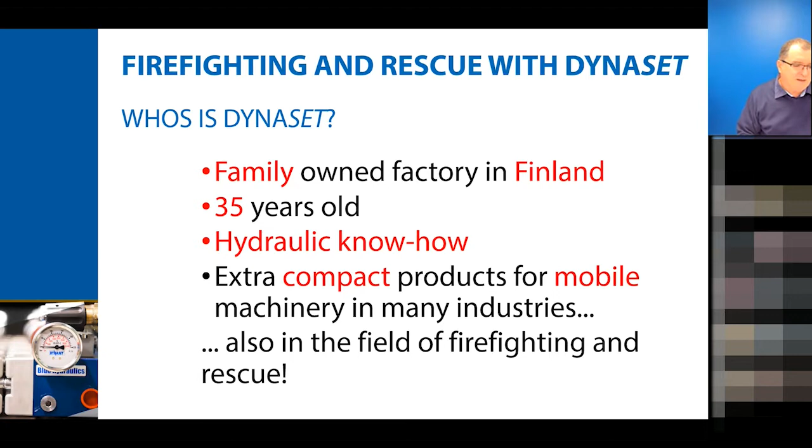So to summarize it, we will use hydraulic know-how, hydraulic power actually, and transform it into other forms of energy. These other forms of energy then give possibilities to work with. For that, on a mobile machinery, we will need to have the availability of hydraulic power. Hydraulic power is needed. We need a mobile power source. So how will it be done?

Very simply, generally speaking, on most of the trucks and fire trucks, if we are speaking about fire trucks, but trucks generally speaking, you can see here a representation of the engine, and here a representation of the transmission box.

And on most of the bigger trucks, you will have the availability of power take off places on the gearbox, which will give movement, which will be a good place to install a hydraulic pump, for example. And if this is not even available on the vehicle, the actual possibility of power takeoff is still existing thanks to the Dynaset HPTO.

The Dynaset HPTO will be not taking its power from the transmission side of the truck, but more from the engine side of the truck, directly on the crankshaft pulley at the front. But all right, we need a power takeoff, we need a hydraulic pump, and we have a power source available on board.

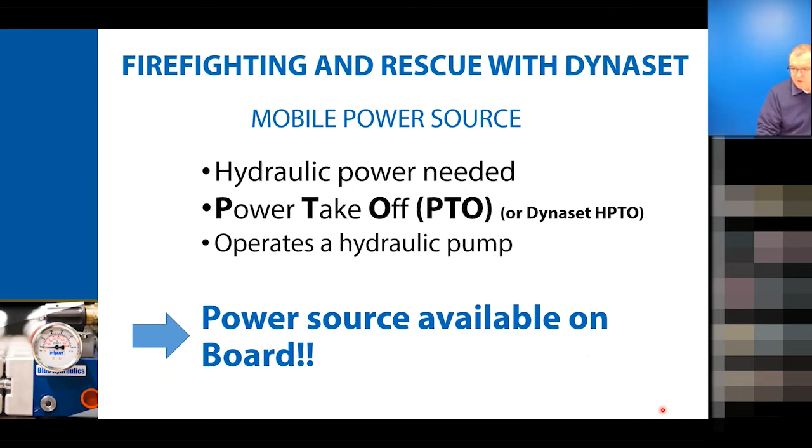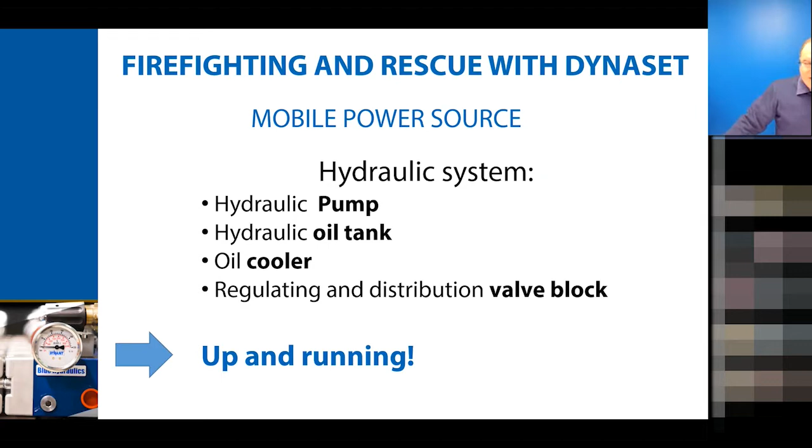This power source is not going to be enough to extinguish fires, that's for sure. We need a few things: a hydraulic pump, yes, check, but also a hydraulic oil tank, an oil cooler, and a regulating and distribution valve block in order to tame and direct this hydraulic power wherever we need it. And we are up and running, with a system able to deliver hydraulic power where we need it.

That's about the hydraulic power needed, and let's see now what we're going to do with it. Let's start first with the firefighting operations, and we'll speak later more about general rescue operations. For the moment, let's just stick to firefighting and fire extinguishing.

We will be seeing what we can do with HPW water pumps, specific HPW fire tools, the FP penetrator extinguisher, the HPP fire pumps, the HCF high flow air blowers, the HSP high flow water transfer pumps, HKR air compressors, and HPU hydraulic power units. That's a lot of different products, and a lot of applications as well. Bear with me, you don't need to remember all the product names right away, you'll discover them one by one in the following slides.

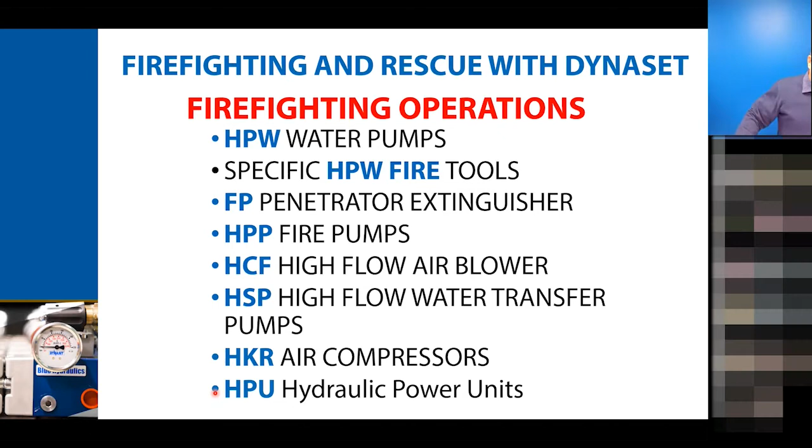Generally speaking about firefighting, I know, even though I'm not a fireman, that there are two schools of thought about the best way to extinguish a fire. There is the traditional way with loads of water, bigger flow, bigger volumes of water spread upon the fire in order to extinguish and flood it. And there is another concept which is more about higher pressure and lower flow of water.

The idea of higher pressure and lower flow of water is what's of interest to us, and you'll understand later thanks to the products we specialize in. A higher pumping pressure means a finer spray pattern, not big buckets of water but smaller drops. This finer spray pattern will efficiently cool down the premises and the fire before you can finally smother it. It also allows for lower water flow - higher pressure lets you use less water, which means a longer firefighting autonomy with the same tank size, and less water damage to property. It probably means a lot more advantages that you professionals already know how to define.

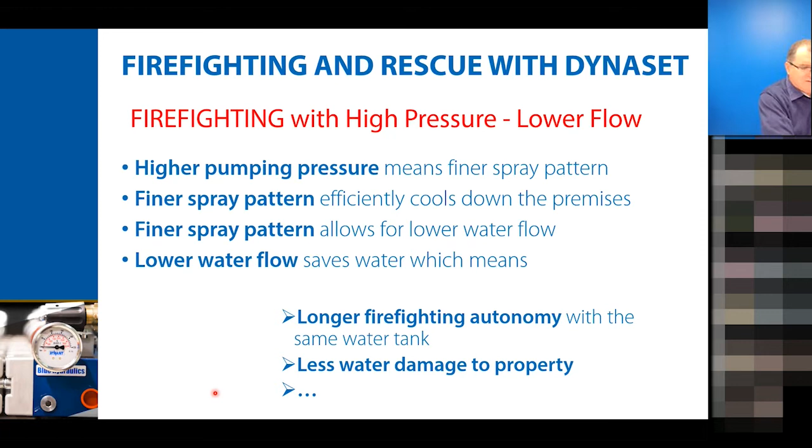So this high pressure, lower flow concept is of interest to us in Dynaset because of this. This is a hydraulically driven water pump, more precisely a high pressure water pump. This is our own design from A to Z, designed by Reijo right at the beginning of the history of this house. The principle is very simple, yet very clever, which makes it very interesting as a product.

Let's see why. As you can see in green here, this is the body of the pump. In the middle, you have an orange area - a mobile group going back and forth. It's constituted of three elements: one central hydraulic piston, and at both ends of the hydraulic piston, you have a water piston on each side. This whole thing is screwed together.

Inside the hydraulic piston, you have a shuttle valve going back and forth as soon as you feed hydraulics to the pump. You feed hydraulics to the pump, and this goes back and forth automatically. How does it do it? Well, it will alternatively draw the oil flow on one side of the piston, then on the other side. It's as simple as that.

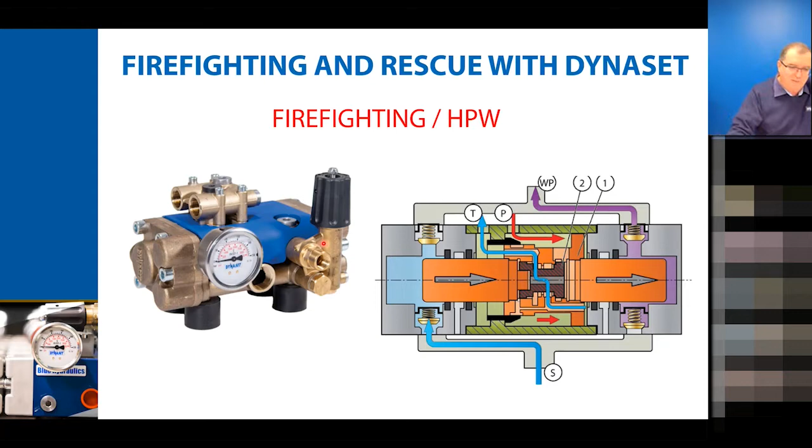It's actually so compact that we know it's the best power to size ratio in the world. But it also presents a lot of other advantages.

It is virtually maintenance free. These pumps don't need to be regularly maintained. You don't need to change lubrication oils or things like that. You just use them, and when needed, you can replace seals and

check valves, water valves, things like this. It is, however, completely field serviceable with standard tools. You don't need special tools, you don't need special organizations in order to service the pump. Once you have the proper documentation, you see it's a very simple unit.

It's self-priming, it can run dry. Yes, it can run dry. It can run without water. And nonetheless, it is a piston pump, but it still can run dry. Amazing? Yeah, I know. You can thank Reijo for that.

On this product group, we have a very, very wide range of models. From a small, the baby of the bunch, 18 liters a minute at 160 bar, up to a big mama that delivers 300 liters a minute at 300 bar. And in the middle, we have smaller output flows but much higher pressure levels, up to 1,200 bar.

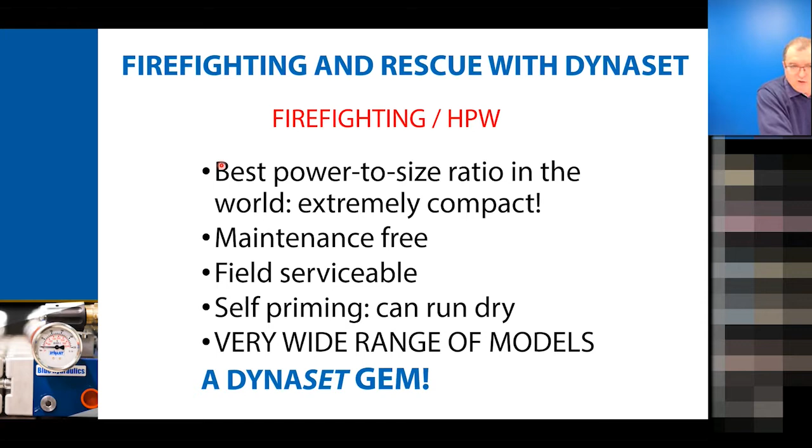Now, what shall we do with these pumps? High pressure, lower flow to extinguish fire. Now that we have this high pressure pumping heart in place, up and running on your mobile vehicle, hydraulically driven, and so on, it will provide pumping function for the following products: HPW Fire.

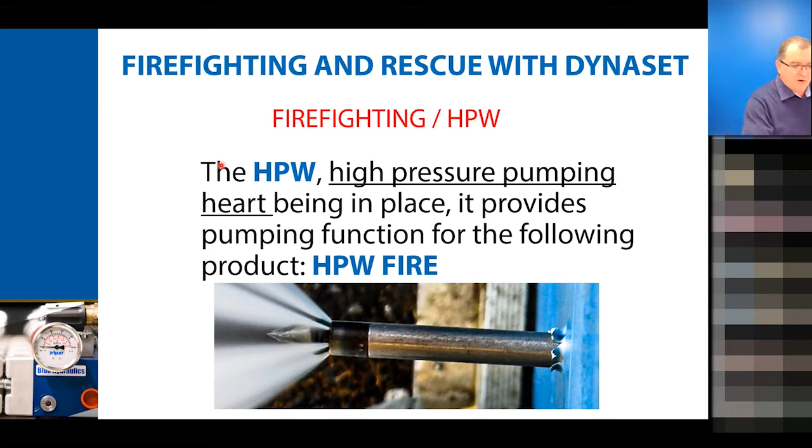HPW Fire using water. It's actually a tool set, HPW Fire sets. We'll see soon what it consists of, but it's actually meant to be used with different pumps.

30 liters a minute at 200 bar, or 50 liters a minute at 220 bar, or for the big needs, 90 liters a minute at 80 bars. As you can see, even the biggest and the most powerful of these still uses only 90 liters a minute. You know what the standard traditional fire pump uses, so I'll let you do the math.

With the same amount of water, you can last much longer. The interest of this tool set is that it's very agile in confined spaces. Why? Because actually the fireman will be pulling behind him the pressure line, the water pressure line, plugged in here to the gun. The water pressure line, being a high pressure line, doesn't need to be very thick or heavy. It's much easier to pull behind and go up the stairs much faster.

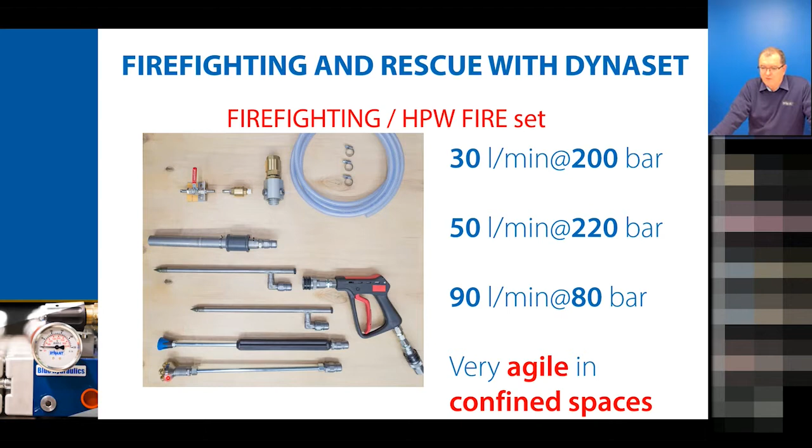This same gun will be used to operate 4 different functions of this set: 1, 2, 3, and 4. Let's discover these functions now, if you will.

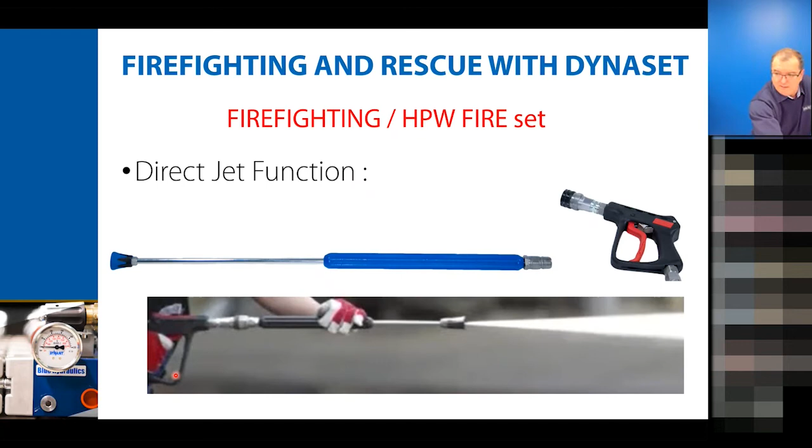Direct jet function. Very simple, doesn't need much explanation. You have one water spray coming from the gun at high pressure, and it's pretty efficient nonetheless, with a strong impact.

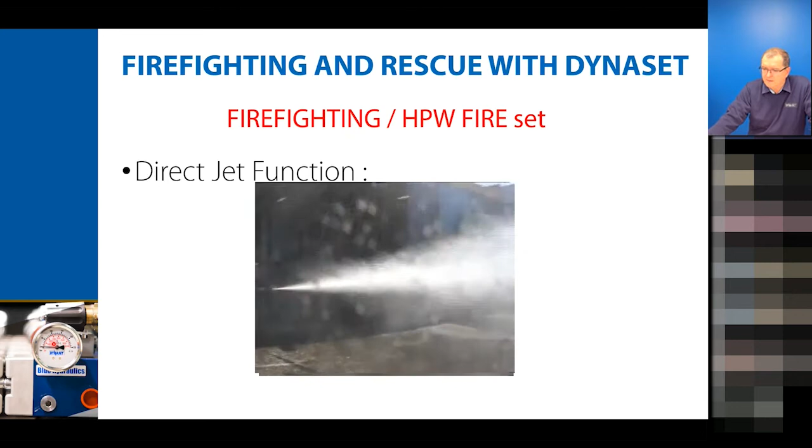As you could see, there's quite a serious amount of power nonetheless, even though it's a smaller amount of water and high pressure. You do not want to stand in front of it anyway. And there is still a strong impact into the flames, into the water, the fire, the heart of the fire.

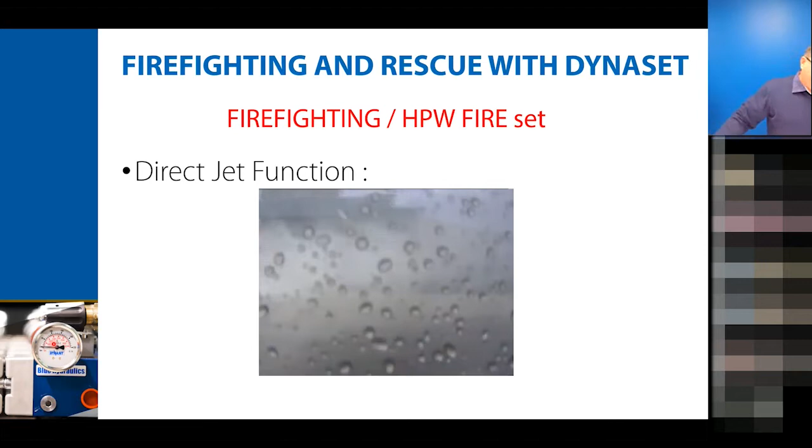This nozzle is as hard as it gets, hardened steel, but you have water spraying jets in the nozzle. This is left straight so that you can hack the spike through a wall or a door frame, through anything you can make it go through. Then, still staying outside of the room with the fire inside, plug the gun in there, let the water go, and you will have what follows.

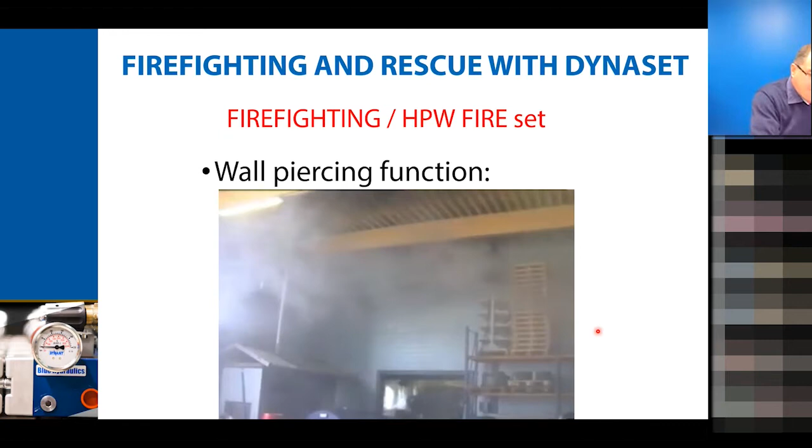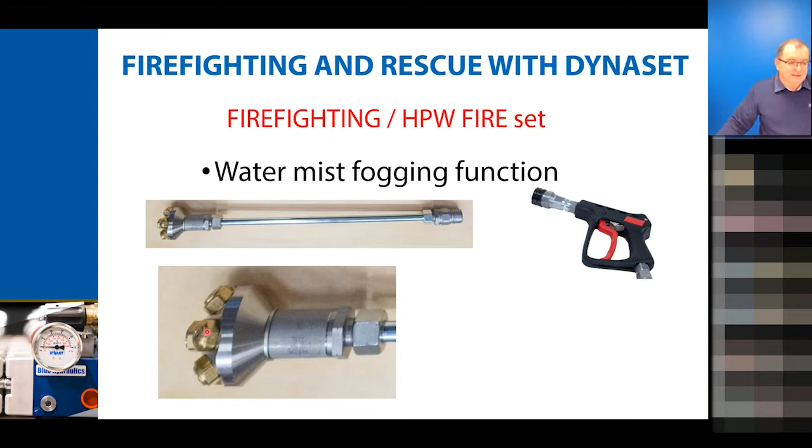Next we have the misting or fogging function. It's still a high pressure flow, with a series of smaller nozzles. Now we don't have straight jets like we had earlier, but a mist, a big amount of fog coming out. A good video will let you understand a bit more about what it looks like.

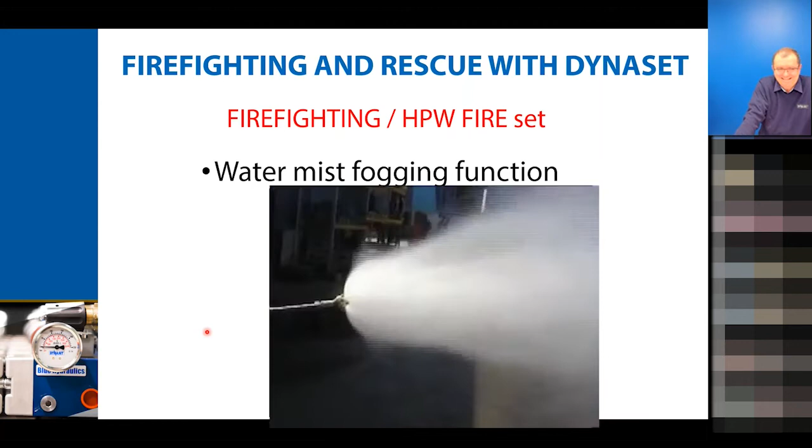As you could see, it's a very thick fog, dampening all the surfaces but not flooding them. Very interesting to cool down a corridor or room while advancing towards the fire. Not the same as a direct jet, but covering a wider area. The principle is more like a sprinkler system with fine fog coming out of it. I truly believe firemen like these functions.

And then the last function of this tool set, the foam gun. The foam gun function consists of 3 components per se, but 2 of these will be on the truck, and the third is a nozzle that the fireman carries with him.

The foam is the conjunction of high pressure water and an additive, some kind of soap so to speak, that creates a thick foam when they mix up in the area of the nozzle. This nozzle also has a setting handle. The more you pull it towards the back, the more air you include into the mixture. If you pull this handle towards the front, you will have less air, and probably just very little foam as well.

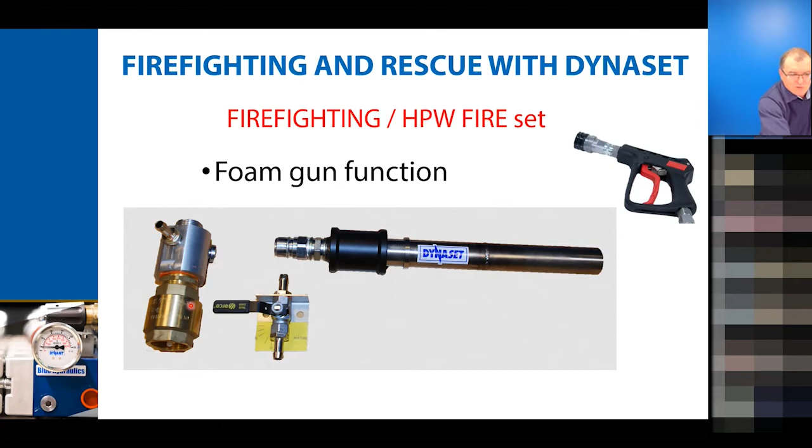So what happens? The fireman is in a confined space at the other end of the hose. He can call by radio his colleague on the truck and tell him to open the suction line. Let's see what it does. This is not CAF, not compressed air foam production. This is something completely different. It's simple foam, and nonetheless, we think it can be of certain interest.

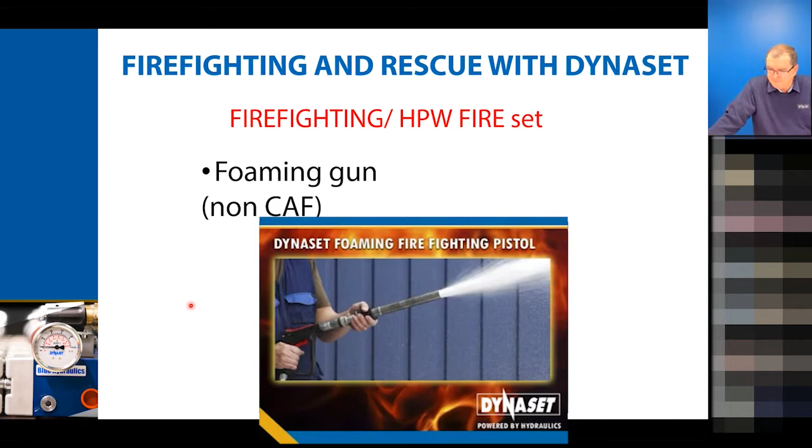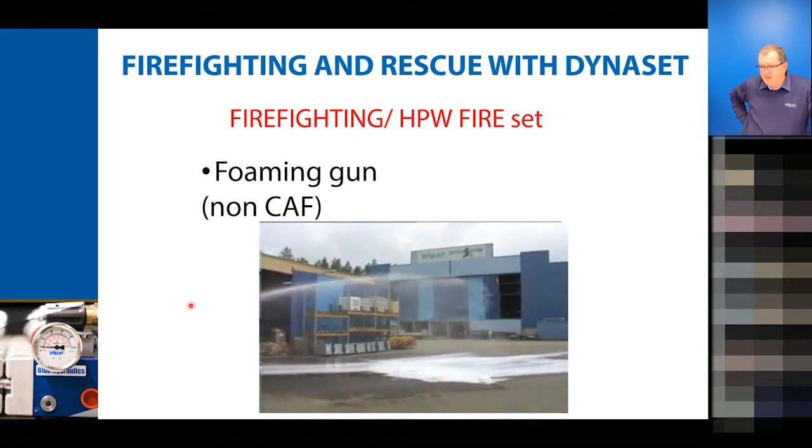There, but you have to try it, you will see. I think professionals can judge the effectiveness of this kind of foam production, especially in confined spaces. We believe it brings some edge to firefighting techniques. That's it about the HPW fire set of tools for firemen and women.

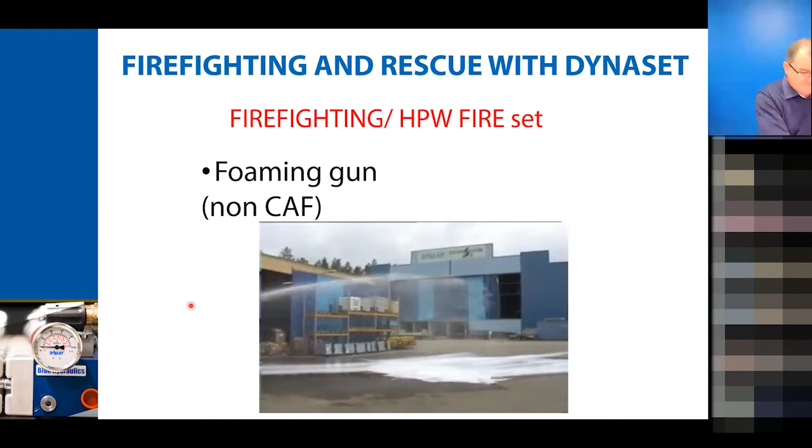Now, next product in line. It's a product using the same properties as the wall piercing tool of the HPW water fire set: the HDFP, the fire perforator.

This thing is an attachment that you can add on a robotic arm of some sorts. We can see later what kind of arm. It also has the same principle, a dart shooting through a window, shooting through a roof or a softer surface. I don't think it would go through concrete per se, but it's pretty powerful.

The interest of this, as for the wall piercing tool we saw earlier, is that by doing so, you will not allow loads of oxygen to enter the room or space you are fighting fire in. You will not allow the entrance of oxygen while extinguishing, which is pretty interesting as well. It will not feed the fire, it will help extinguish it.

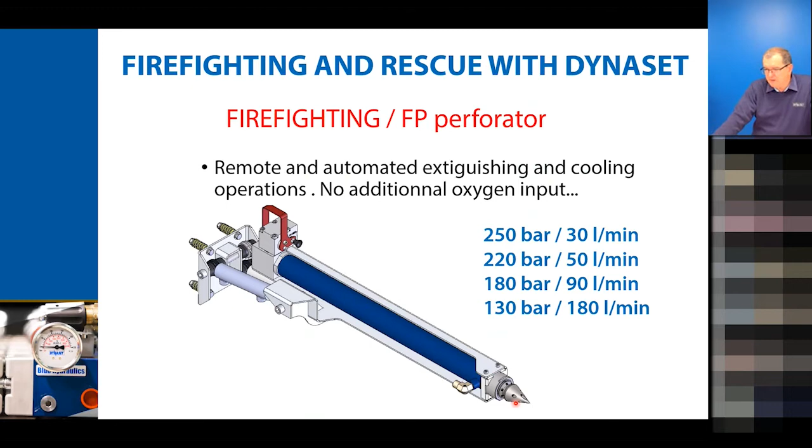We have 4 models, actually the same body, working for different pressure and flow levels. We will be working with different nozzles: 250 bar 30 liters, 220 bar 50 liters, 180 bar 90 liters, 130 bar 180 liters for the big mama. This all depends on what HPW pump you will be using.

You can see more in detail the spearhead of the spike. You have 3 nozzles spraying straight forward, 3 nozzles spraying at an angle of 15 degrees, and 6 nozzles around here spraying at 40 degrees. You will see the spray pattern that it gives later on. We can replace these small nozzles in order to obtain the proper pressure level at the proper flow.

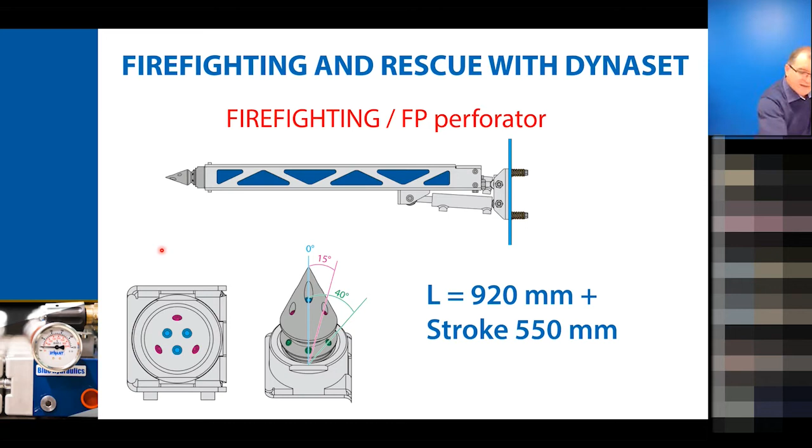The whole length of this, let's say in non-working position, is 920 millimeters, and the stroke is 550 millimeters more once it comes out. There are 2 little cylinders allowing the operator to direct precisely X and Y, like where he wants the dart to go.

As I said, it can be installed on lifting platforms, robotic arms, you name it. And I even believe that it could be possible to put some extra installation on a fireman's big ladder, for example. But I'm not a specialist, but what the hell, it should be possible.

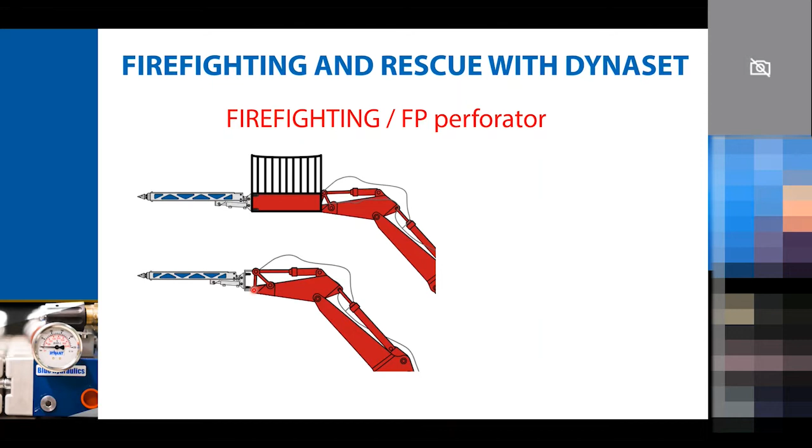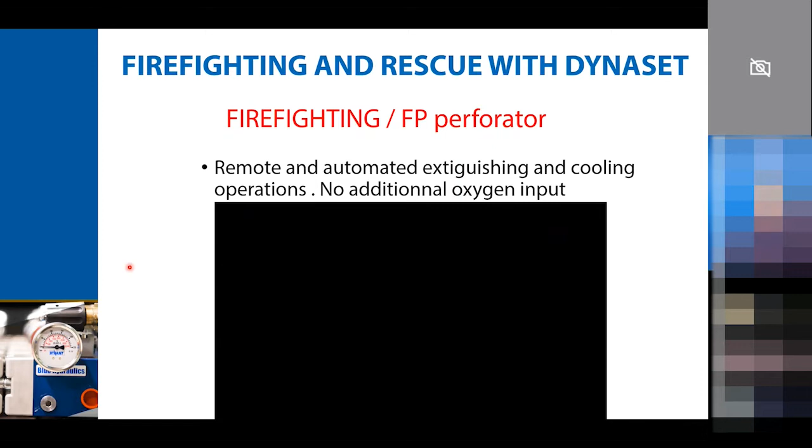So the interest of this product is the remote and automated extinguishing and cooling operations with no additional oxygen input. The fact that it's remote also adds to the more secure way of working. You don't need to have a man hanging outside of the window of a 5-story building. It can be done from the ground with a camera.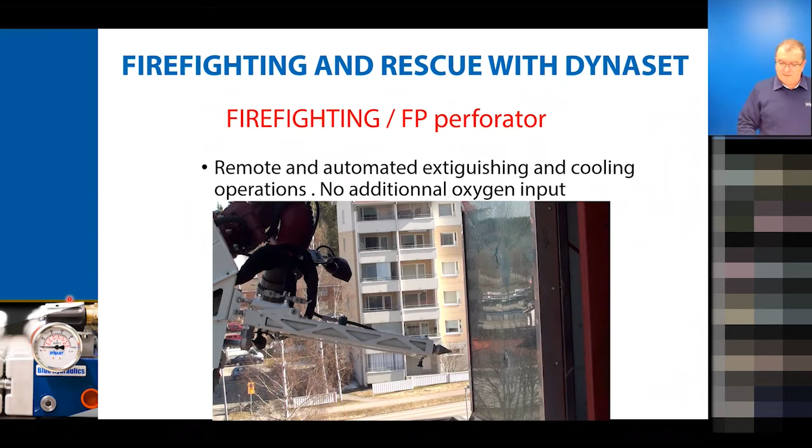There, you could see the spray pattern, and keep in mind, please, that the spray patterns can be a little bit different depending on the water flow and the pressure level that we are using, so depending on the pump.

In addition to these tools that I've just presented, there is also a very interesting function that can be added to any forest firefighting truck, such as the one that you can see on the right side of the slide. This is just an example.

Since you will have an HPW high pressure water pump on board the truck, it is then possible for you also to install a self-protection device on the truck, meaning that you will install a high pressure water misting nozzle series all around the truck.

All around the truck, protecting the underbody, protecting the wheels, the upper body, the windshield, and everything. This is interesting to protect the whole truck from heat. As the professionals among you know, the idea of being surrounded by flames because the fire has been so fast that it surprised the fireman. This equipment makes the fire truck a safe haven for the fireman.

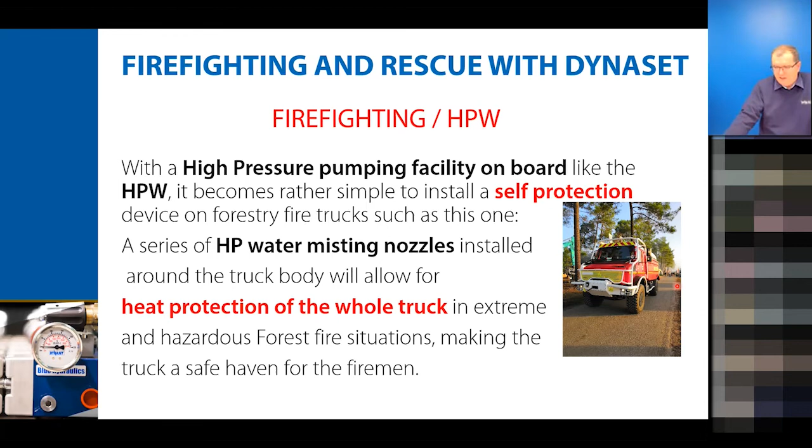These are not the biggest pumps that exist in the world of firefighting, but they are still interesting, I believe, ranging from 1,500 liters a minute to 600 liters a minute, smaller, for the smaller one. And the pressure level, as you can see, is there. So these two are available from us.

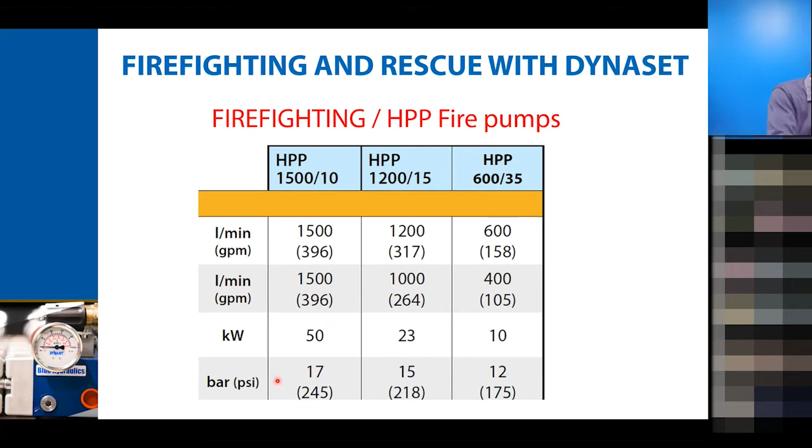Now about extinguishing, let's move on to the next product concept. It's not so much about stopping the fire itself, but more about smoke extraction. Smoke extraction is central in fighting fire in buildings because of visibility and also because of the heat that smoke keeps within itself.

This is a representation of an HCF centrifugal air blower developed by Dynaset. It's hydraulically driven, no surprise there. And it's an air blower, which for us was originally destined to create a void, suction. But being a fan, it also creates a high airflow.

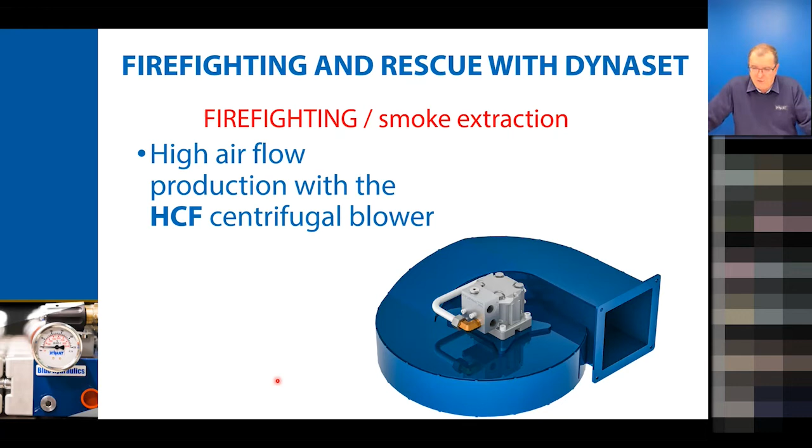And this high airflow can be pretty interesting for people who want to develop mobile smoke extraction capabilities. Using this will be like any snail-shaped blower. It will suck from the middle, under, and blow out there, simply with a pressure line and a return line on the hydraulic motor.

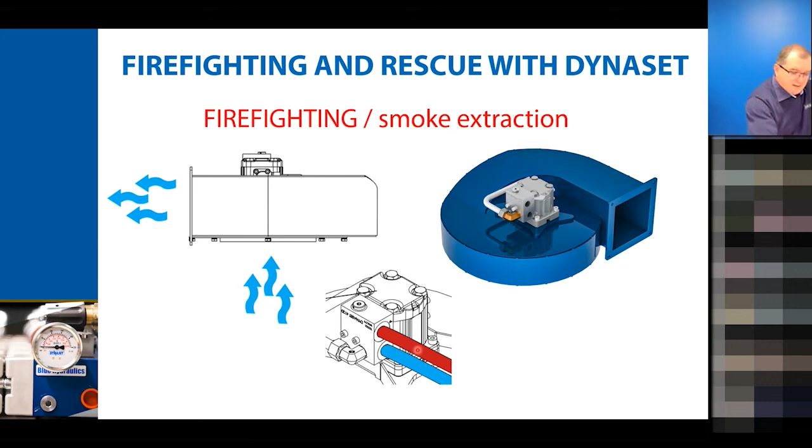We have a very nice product range that my colleagues from the R&D have developed, so that OEM developers themselves can base their work upon this. We have a smaller one, 800 liters a second, up to a bigger one with 3.4 cubic meters of air per second.

There you have it. I can imagine a truck, a smaller truck with a nice hydraulic pump coming up to a building fire and pulling out a hose at the entrance of the stairs and blowing all the air that the smoke extractor can push into the building so that the smoke can get out of it, making the rest of the operations a little bit easier.

There we go about the HCF and smoke extraction. Next, for firefighting, as we've been speaking since the beginning, we use quite a lot of water.

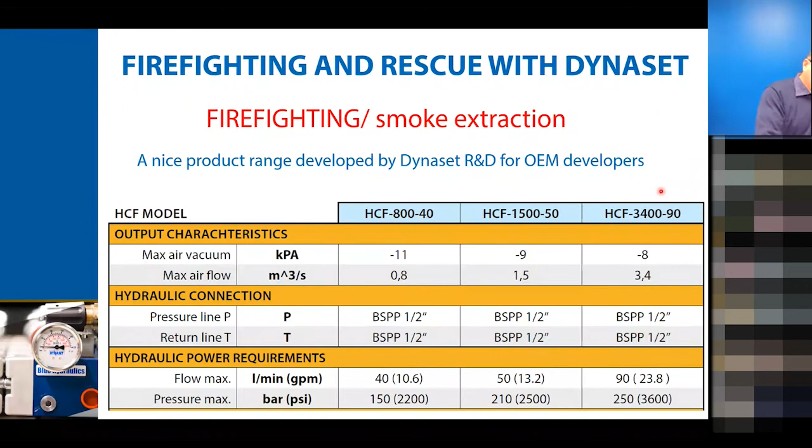Normally when you are in the city, you can get water from the fire hydrant posts and get your truck tank filled up through different ways. But a good thing is to be able to go and fetch the water where it is - let's say a nearby lake, a river, a swimming pool, depending on the operation situation.

And for this, you will need a pump which is sturdy, easy to operate, very efficient, and will not be afraid of pumping a few stones with it if it so happens.

These are the HSP transfer pumps. These are heavy-duty centrifugal transfer pumps. The turbine itself is made of Hardox steel. So originally, these are meant to pump mud.

So they will pump clear water without any problem. And it's very adequate to refill a big water tank on a truck from anywhere you can find water.

The concept is simple. Hydraulics in, hydraulics out. You have two hoses coming in, and then you have the discharge hose bringing the water that this pump will throw out, and bringing it to the truck. You only need to run with the pump, drop it into the water source, and set the hydraulics in motion. And this will send water into the truck.

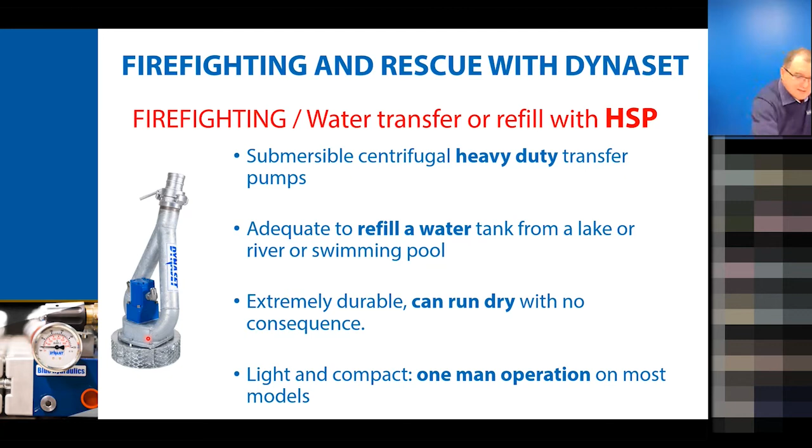And it's also interesting to see that this whole pump product range is light and compact. For most of the product, it can be a one-man operation, because as you can see on this very wide range, these two bigger ones deliver 16 cubic meters a minute, and this one 10 cubic meters a minute at a height of 5 meters.

These two are respectively 85 kilos and 70 kilos. It's much more comfortable for two guys, two firemen, even though they are generally very strong, to make it a two-man operation to move the pump around. But for the rest of them, one man can do the job - running to the river, drop the pump, etc.

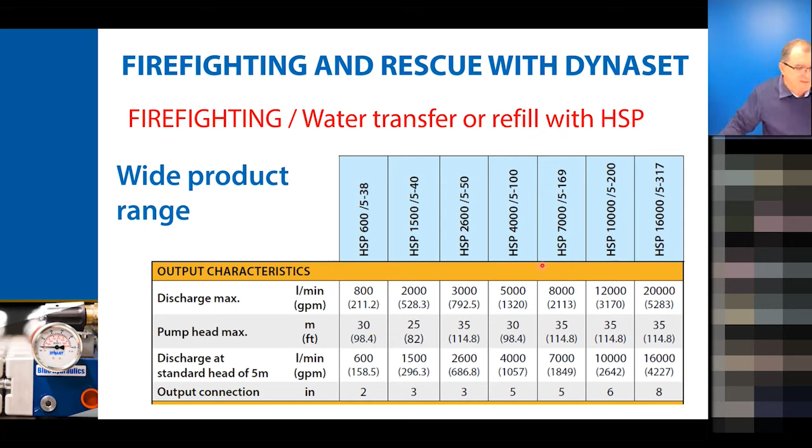Let's see a little demo of this.

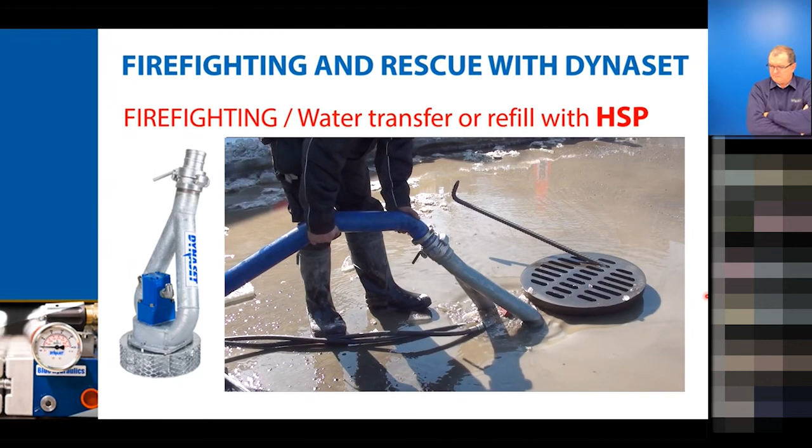So as you could see, this was pumping mud, very muddy water. I didn't have a video clip with clear water, but it can do the job, of course, with clear water as well. These pumps don't take a lot of weight or space in a truck, and can provide a fire truck with a certain autonomy in refilling its water tank.

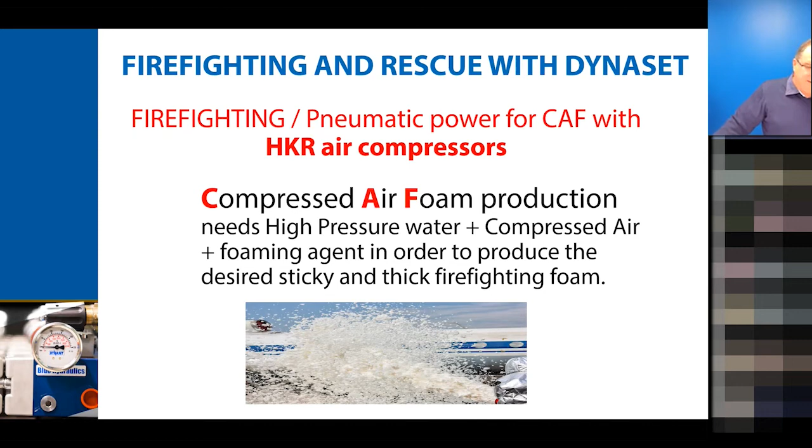Next, we've been speaking about non-CAF foam production, simple foam production with a simple additive into the water. But we now speak about CAF systems. Compressed air foam production needs several things to happen: high pressure water, compressed air, and a foaming agent, all mixed together in the CAF unit, in order to produce the desired sticky and thick firefighting foam that will get stuck onto a wall or any vertical surface and stay there, not drip down. So we are not proposing a CAFS solution, we do not propose CAF systems.

But now that you know about the HPW, that you have an HPW on your truck, you will need only an air compressor to produce the desired foaming conditions for the CAF foam generation.

The unit that you can see here is an HKR air compressor, which has a hydraulic drive. This is actually a screw compressor. Two screws running one against the other will allow for air to be compressed in a continuous way. This can work for several hours. If the installation is properly made on the truck, this can run and run and produce compressed air for a very long time.

You have high pressure water from your HPW, you have compressed air from your HKR, and you can produce your CAF. We are facilitating the installation of the CAF product itself on the truck, by providing high pressure water and compressed air. So HKR is one more product.

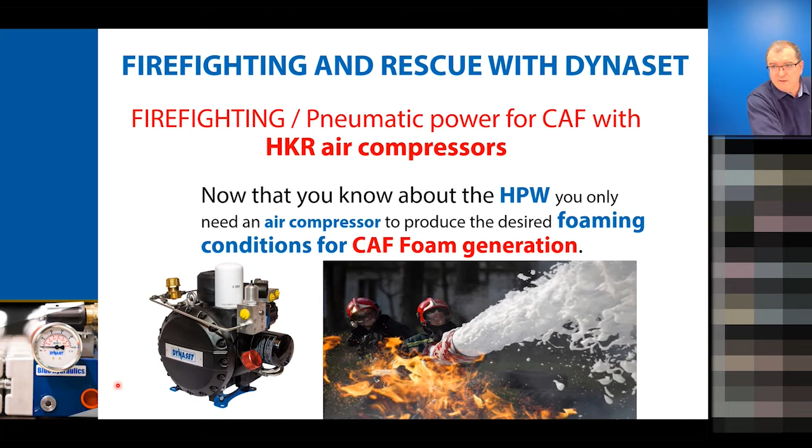And then in the firefighting, last solution that we propose for the firefighting activities, we've seen about the HSP water pumps, how to use them in order to refill a water tank on a fire truck. But we can also propose something that would avoid leaving a truck near a watering site.

This is an HPUD, a hydraulic power unit. This HPUD is an interesting unit that runs on a diesel engine. It's completely standalone and will provide hydraulic power for any operation that you want. In the field of firefighting, the interesting thing is to set up on the side of a lake, for example, a pumping station.

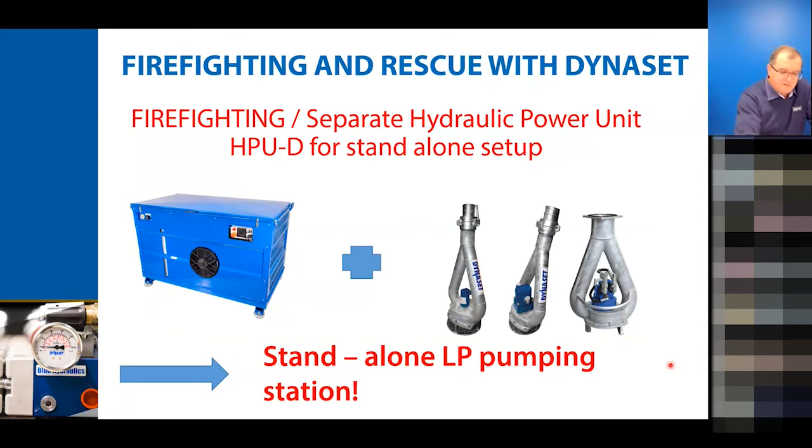And this will be the power unit, the only power unit that you need. This with an HSP pump of your choice, and the pumping station is ready to go. As you can see, you have a nice diesel engine there running a hydraulic pump at the bottom. This is the fuel tank, and here you have the hydraulic system with the hydraulic tank, return filter, etc. And this is the cooling facility of the engine itself.

There are two models. The one with the biggest output would be 210 liters a minute at 210 bar. This thing is fully standalone. It's actually air transportable. It weighs a few hundred kilos, so two men cannot just move it around, but it's air transportable. It's a very quick setup.

Once you have set it on the floor, there's an electric start. It's a one-man operation, actually. You can have a one-man operation pumping station ready for the trucks to come and refill the tank in case of a remote forest fire operation, for example. It's a perfect hydraulic power source.

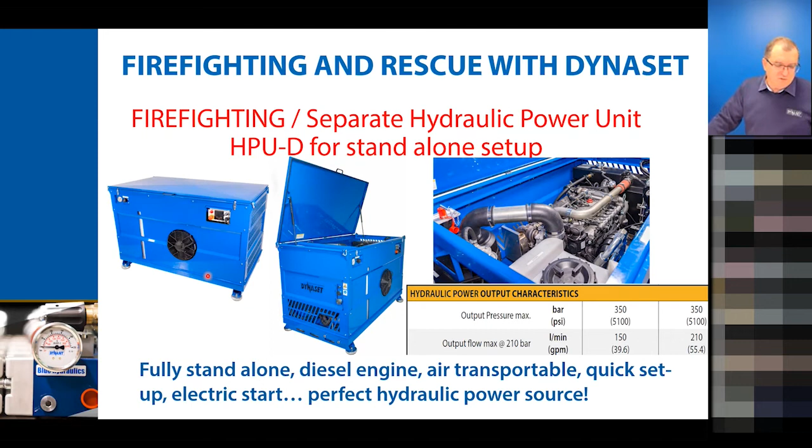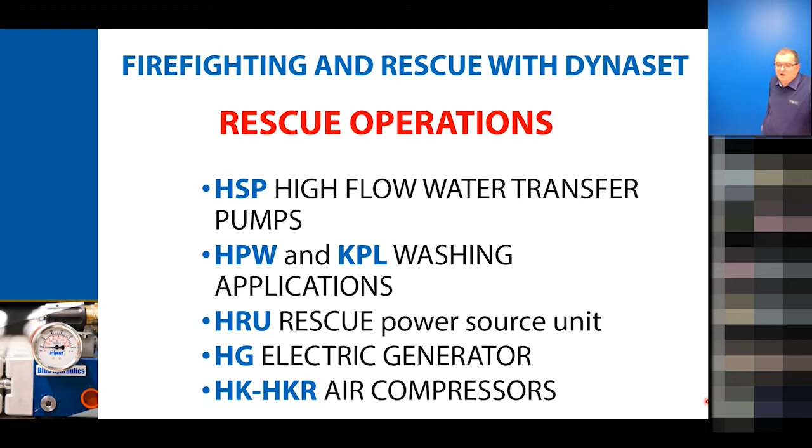There you have it about firefighting possibilities with the Dynaset products. Now we will be shifting to more rescue operations, not firefighting per se, but general rescue operations, which is also the lot of the firemen. We will be speaking again about the HSP high flow water transfer pumps that you already know, and also what we can do with the HPW and the HPW based KPL washing applications, rescue power source units, electric generator, HK and HKR air compressors again.

Let's go. So you know about this pump, it's the third time that we speak about it. Water transfer with HSP. This is, as I said earlier, a submersible centrifugal heavy-duty transfer pump, extremely durable, that can run dry with no consequence to the pump, and it's made to pump even mud.

Actually, if you look at this grid here, it's quite a big grid. If anything goes through this grid, it means that it can go through the pump. So a few stones here and there will not do anything to the pump. It just will go through.

And where do you need this for rescue activities? Well, it's pretty adequate to empty flooding areas, flooded basements, also to evacuate some unwanted chemicals, you name it. And I think the professionals of rescue operations can see by themselves what advantages this pump can provide.

The interest of this pump is also that, as for all of the products that we have seen, except for the hydraulic power unit, this doesn't need an extra gasoline engine to run. It will be run by the truck itself.

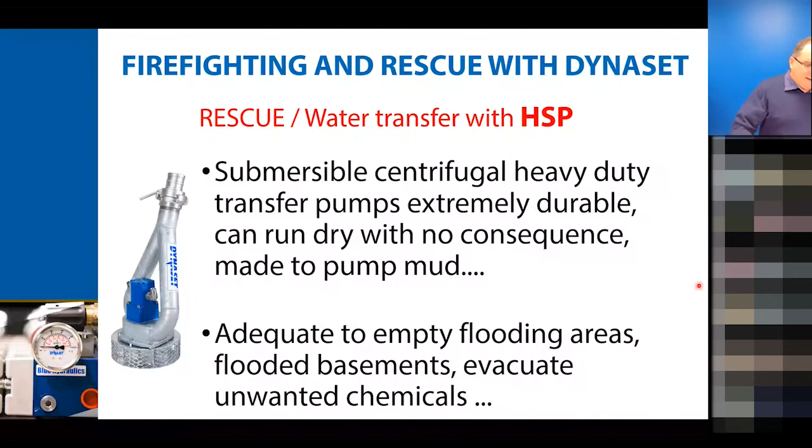Now back to high pressure water. This is an old friend of yours, the HPW. And based upon this technology, we have, for years and years as well, developed several applications for the washing operations.

Very simple. If you already have an HPW on the fire truck, well, it's very easy to use it to wash something. But you have a few other options.

You have a pump on the little chariot there, on the little trolley. You have hydraulic push-pull for quick connection on the hydraulic side. You have a suction filter here at the end of this blue suction hose. And once you feed it with hydraulics, it will pump.

Remember, the HPW is self-priming. It doesn't matter that this hose is empty at the beginning of operations. And on this, you have a 10-meter long high pressure water hose and a washing gun.

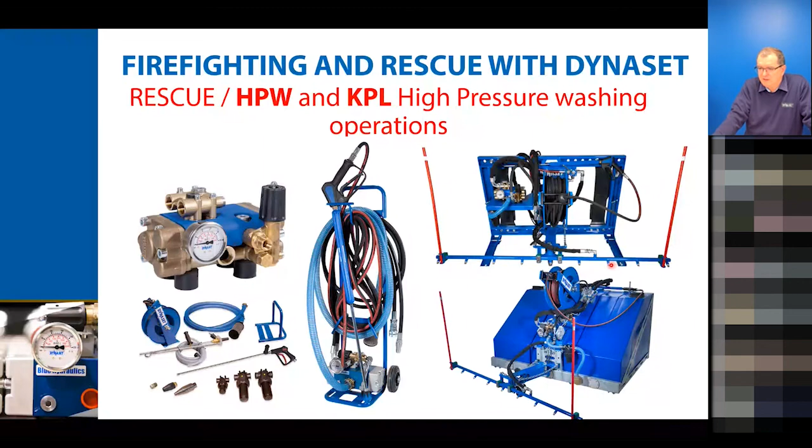You have a washing ramp with a series of high pressure nozzles meant at digging in the dirt of the road that you are cleaning. This is originally developed to be working on roads, of course, but for rescue operations, it can be used for other purposes as well, not only roads, but bigger areas.

And it's also ideal for spreading chemicals that would be needed to fight other spilled chemicals, for example, or disinfectant products if you do not wish to use only water. As you can see with the KPL, it's meant to be used under a very wide array of different configurations.

You can either have everything at the front of the vehicle. Here it's a tractor, but of course it can be anything you want. You can have everything but the washing ramp at the front and the rest at the rear. You can have only a pump and a reel and a washing ramp at the front, and the tank can be yours, etc. The configurations are very numerous and very interesting.

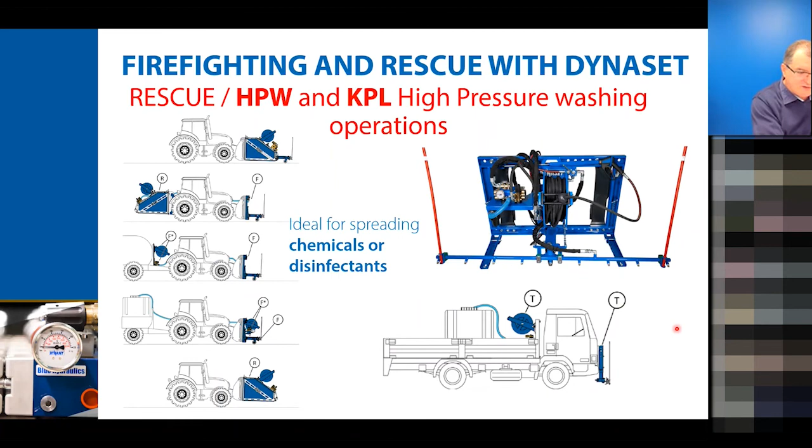Next, let's speak about what Dynaset can do for the jaws of life - these rescue cutters, spreaders, and so on. They will need, as we all know, a very high hydraulic pressure level in order to function properly.

The thing is, on the truck you probably will not have the desired pressure level coming directly from the hydraulic pump installed on the truck. You will need a secondary unit that will use the hydraulic power from the main pump and transform it into a higher pressure, lower flow hydraulic power line.

This unit here is as compact as we could make it in order for it to be easy to install on a fire truck. As we know, with all the machinery, the free space is a bit scarce. But this unit has its own hydraulic tank with a level glass and temperature glass, giving information on the amount of oil that you have. This is a filling cork and a breather, and then you have the return line.

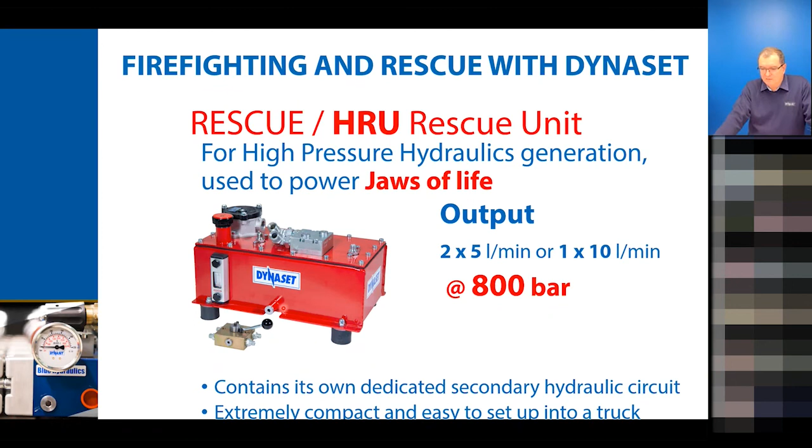As you can see, you can have two kinds of outlets, either twice 5 liters a minute or 1 of 10 liters a minute, depending on the equipment you want to feed. The max pressure level is 800 bar. So you have your own dedicated secondary hydraulic circuit with its own dedicated pressure level. We have developed this especially for these products.

Now, after the HRU, let's go on with the electricity production. HG, one of the biggest product groups here at Dynaset. We have a very, very wide range of electric power generators, which are hydraulically driven.

IP23 or IP54, as you wish, depending on the application you want to do - this is the protection class. With a range going from 3.5, and actually smaller than 3.5, it's also 1 kVA, that's DC, up to 80 kVA, 50 or 60 hertz, as you wish. What can I say? Make your pick.

Make your pick. It would be a very surprising thing for you not to find an HG model which would respond to your need. It would be a very big surprise.

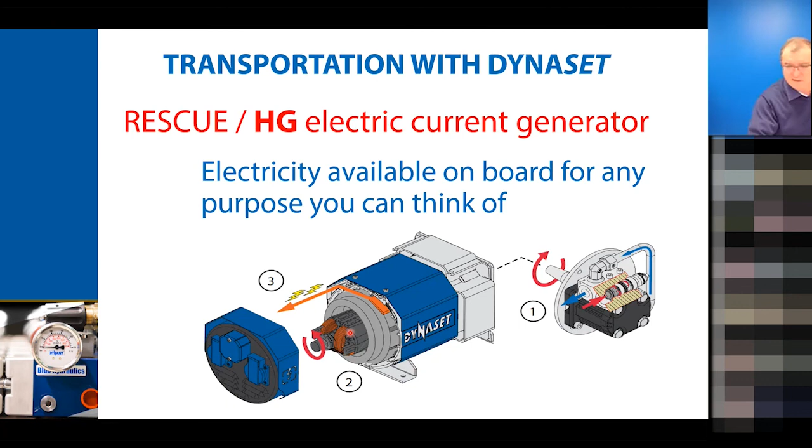Running that way at a very steady pace, it will guarantee excellent quality in the produced electricity, the produced current that you want to use for your appliances. What for? Well, power tools, floodlighting, emergency power supply - this is something that comes about pretty often. Generally speaking, you need electric power, you have it. Give us a call.

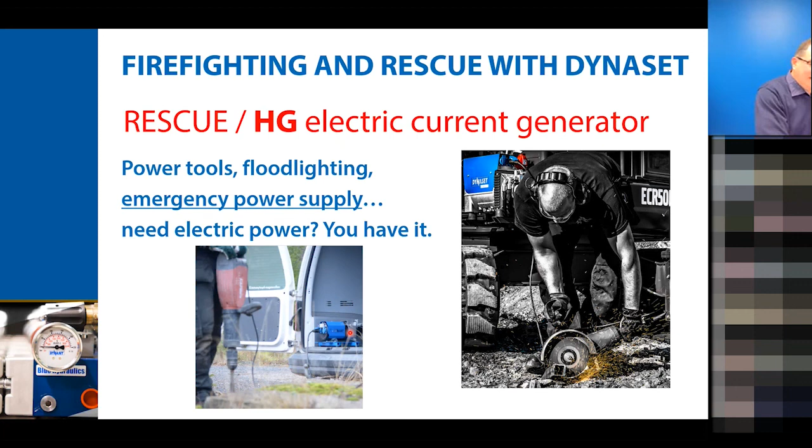Let's go on about the use of compressors for rescue operations. Now, we have, generally speaking, two kinds of air compressors that I like to propose for these operations.

Piston compressor, very simple. Everybody knows about this. Very easy to maintain, very easy to upkeep. The thing is that with a piston compressor, it will be more for intermittent use, not for too many hours on the road, because it's not designed for this. Or then you will need to have a bigger air tank somewhere so that it allows to stop every once in a while.

But then you have also the HKR that you already know, screw compressors. The interesting thing is, depending on if you need big amounts of compressed air for the application you have in mind, an air compressor like this, when properly sized, will deliver enough air for you to use directly without an additional air tank, which is very interesting because an air tank takes a lot of space on a truck.

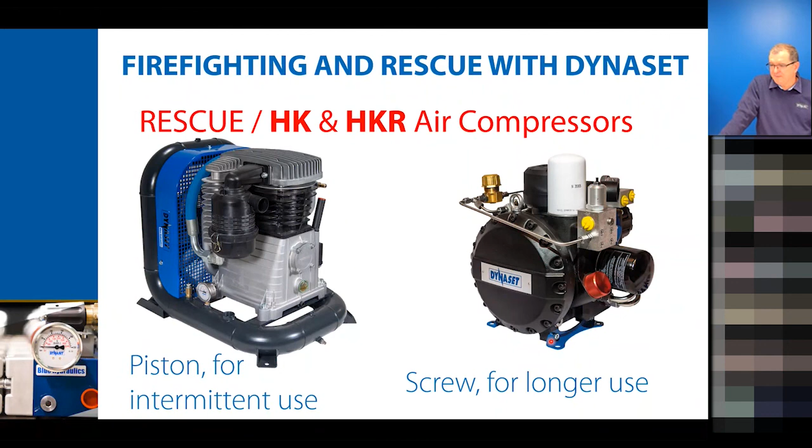And where do you need that? Well, for rescue operations, you know that. These lifting cushions, these rescue bags, and this is only one example of them, will use some amount of air, yes, but mainly they use pressure levels which are exactly within the range of the HK and HKR air compressors. That is 10 to 12 bar.

From let's say 500 liters a minute to 7,500 liters a minute output, and there's even more. There's even a bigger one. Call us for more information on that one.

There you have it. These units are very, very compact, once again, which is the way we do things here. These are perfect for rescue bags operation, with the availability of compressed air right away on the truck when you need it. Also, they are perfect for air tooling. Any kind of common air tool that needs compressed air to work, you will be able to use anywhere you need pneumatic power.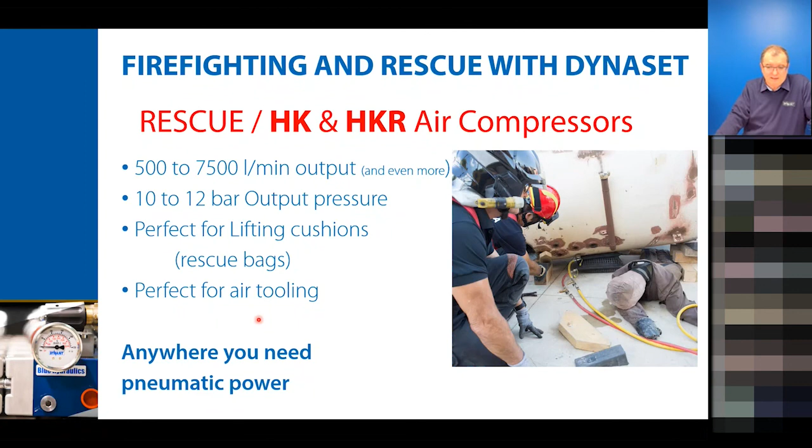Now, that was about it. We've seen a lot of things. I like to think that that will hopefully give a lot of ideas for fire truck developers and other people in that field, and also for some of you who want to propose further these products to people who might need them in these applications.

We've seen all the HP, high pressure, LP, low pressure, and high flow, and even low flow water applications. Not going into details of them, but you know what can be done.

And also specific firefighting solutions, agile for confined spaces, easy to carry, easy to deploy, fast, efficient, and not using too much water. You've seen compressed air applications, high flow air blowing applications, electricity generation, power boosting capacity, hydraulic power generation, hydraulic electric power generation, actually.

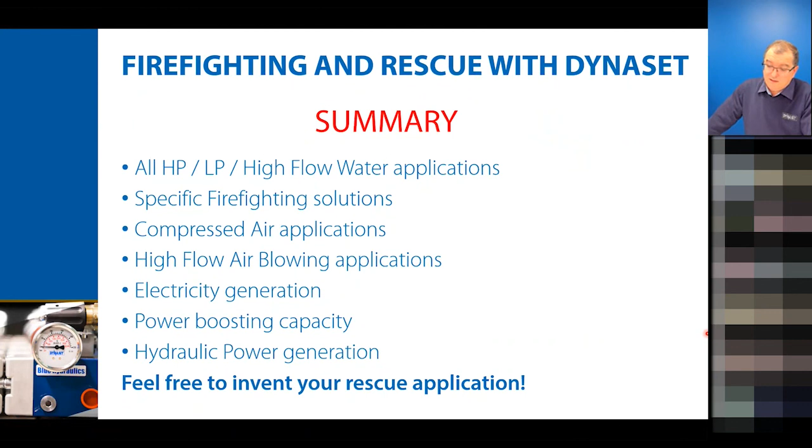That's a lot of applications for firefighting and rescue operations. Feel free to invent your rescue application with our products, because if you have something in mind, it's most probable that Dynaset can provide.